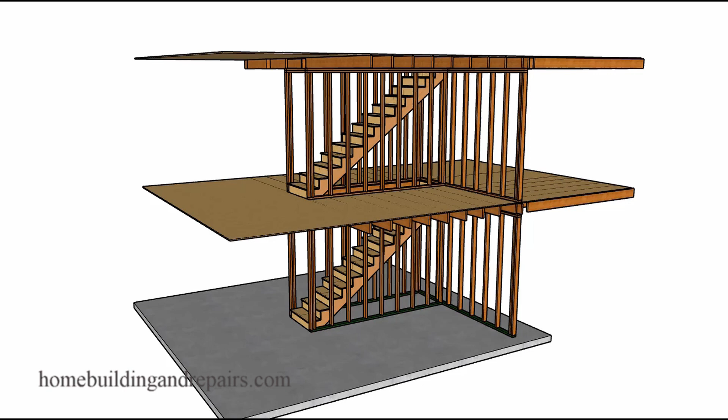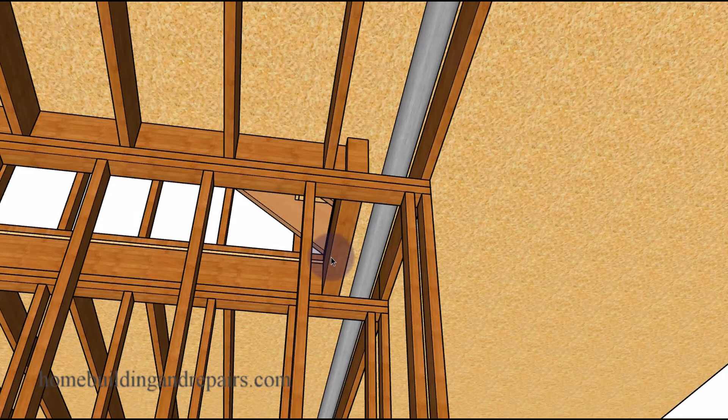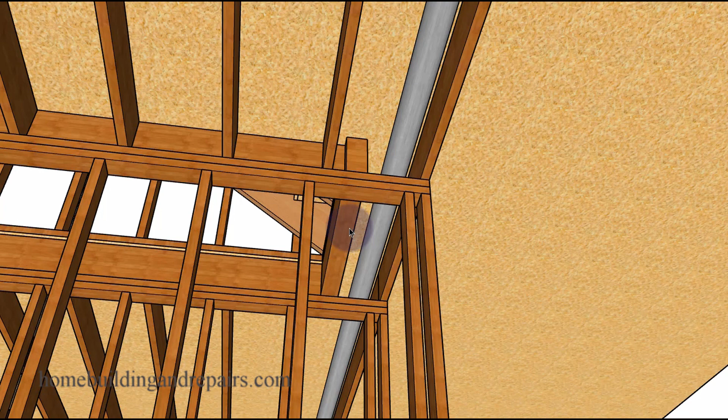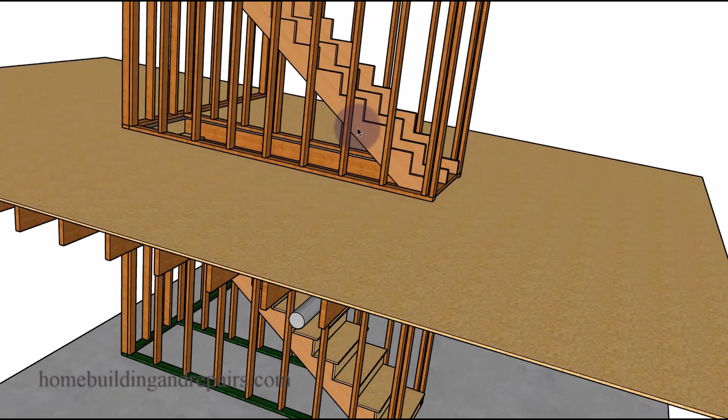So that could translate into this beam right here needing to be moved if you don't have the headroom clearance between the bottom stairway and the upper ceiling. So let's go ahead and take a look at this way of framing. And as I said, you're not going to have a problem with this because the stairs are going to be sitting on top of the floor framing, and whatever pipe you're going to be running through will run through the floor framing.

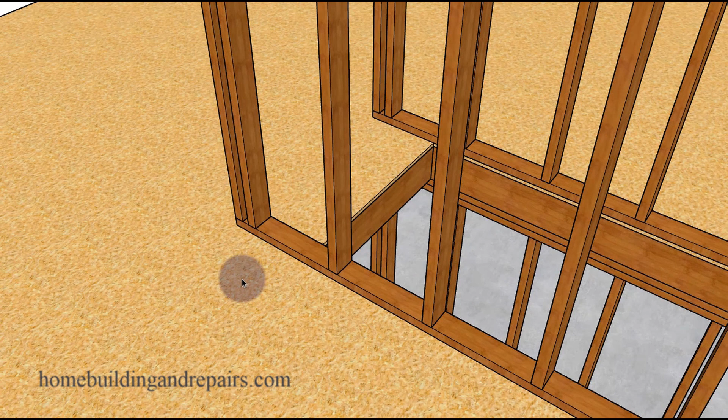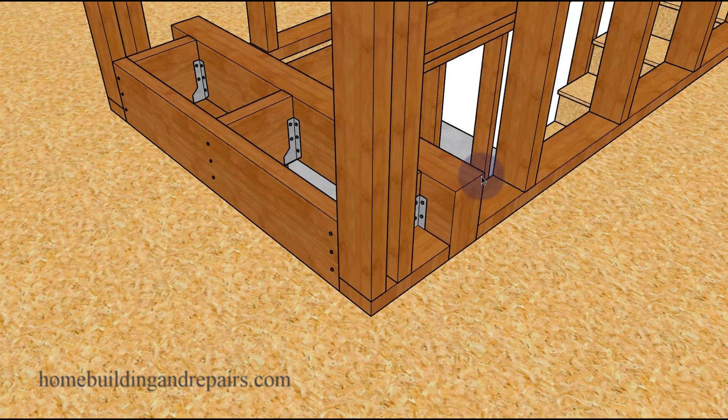However, if that is not the case and you need a little more headroom, then you might want to try using this method here. And that would be to install some type of a structural support beam for the bottom step. Now, this board will need to be ripped down along with the beam in most cases, and you might need to set the beam on top of the floor sheathing to provide you with a taller beam. So keep that in mind if you are going to do something like this.

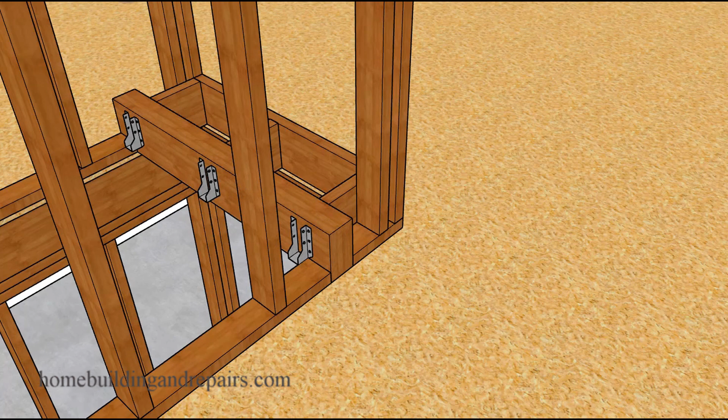And this board here will also be the front of our riser, and that will become a little clearer here in a few minutes. And we're also going to need hangers. These hangers will be used to support the stringers, and you can see here where this board right here is sitting on top of the floor framing, and in some cases you might be able to modify this if you need a little more headroom. So not too difficult here.

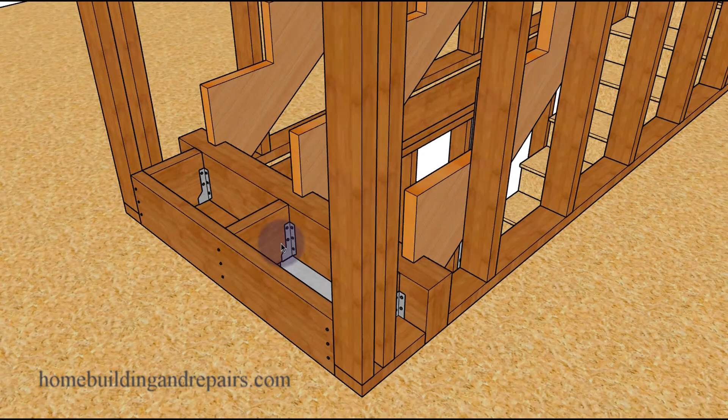We're using a structural beam to support the stringers and some other boards to help create our first step, which we will go ahead and put the treads and risers on to give you an idea of what I was talking about here. And if you do something like this, make sure that it is positioned correctly so that you have the correct overhang and stair tread depth.

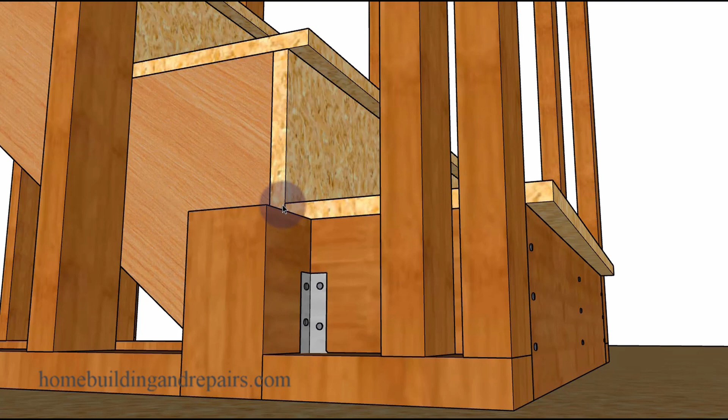Now let's start taking a look at how we're going to run a pipe through here. And the pipe that the individual was going to run through here was going to be for a dryer vent. But before I show you a picture of that, let's just take a look at this to provide you with an idea of how you could finish the drywall ceiling to create a flat surface. And that would be to just straight edge down the stringers and then draw a line on the joist so that you can cut a shaped block to fit in here.

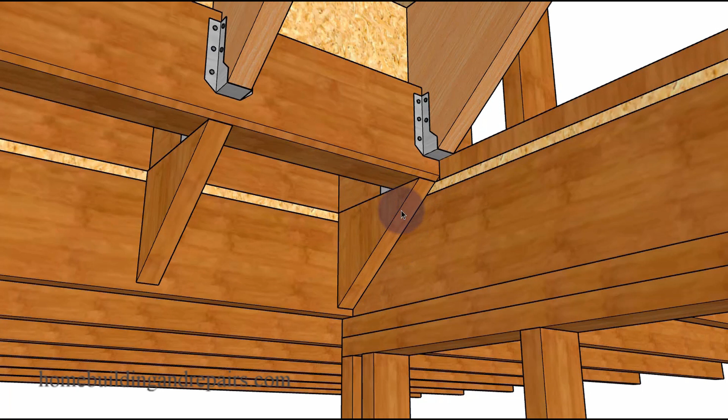However, you will not be cutting that block. You will be cutting this block here if you are going to run a pipe through here. So not too difficult. You can see where the framing to support the stair stringer is going to create a nice structurally sound support system so that you don't need to notch the stringers.

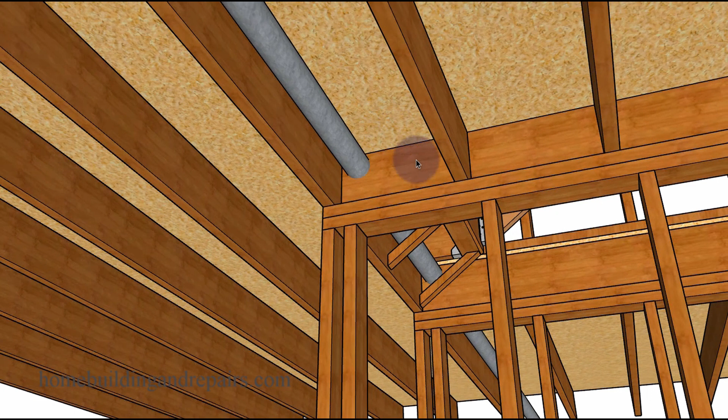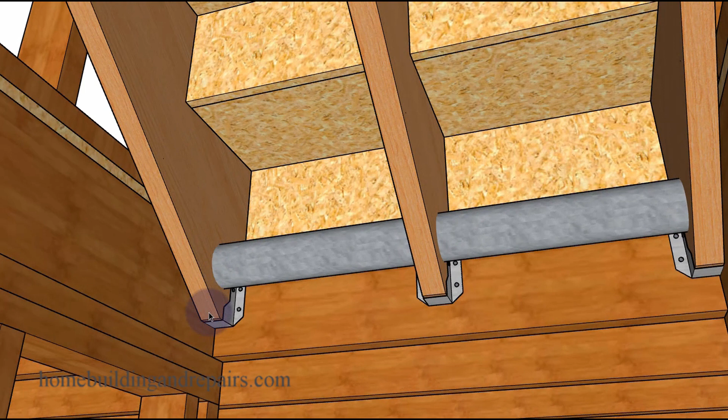And for those of you who don't know why we did all of this to begin with, let's just go ahead and take a look at a standard method of construction that won't work in a situation where you're going to run a large pipe through the main structural support of your stair stringer. So something like this you might be able to get away with.

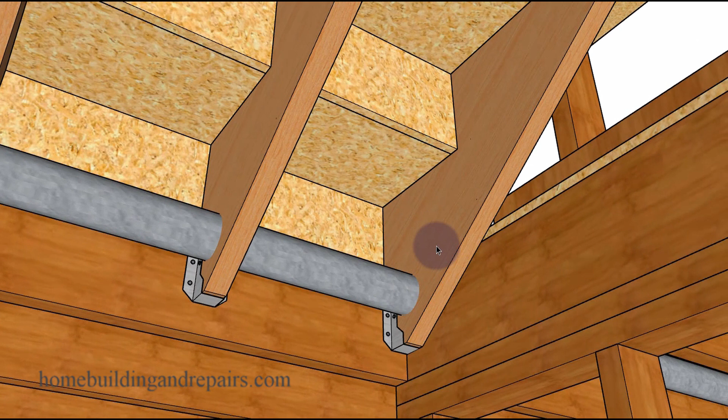You might be able to attach this stringer to the framing studs so that the stringers up against the walls can be structurally supported, but you're still going to have a problem with the middle stringer once you start hacking a lot out of the stringer so that you can run your pipe through it. So that's it for this video.